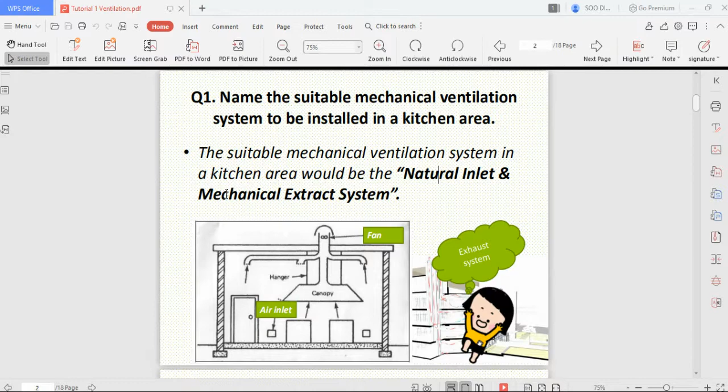This is like question 1, where the kitchen area also uses a mechanical extract and natural inlet system. There are 3 points to this. The first is air is extracted out from the assembly hall through extractor, inlet, ducting, and fan. This is the system, the components making up this ventilation system.

The second and third points are the important part. As you can see here, there's a negative pressure and a positive pressure. Ventilation works in such a way that a mechanical extraction system is installed to make these pressure differences occur. The pressure of the ventilated space becomes less than the pressure outside the room, which is a negative pressure. The higher pressure outside will force air into the negative space through the fresh air inlet or opening.

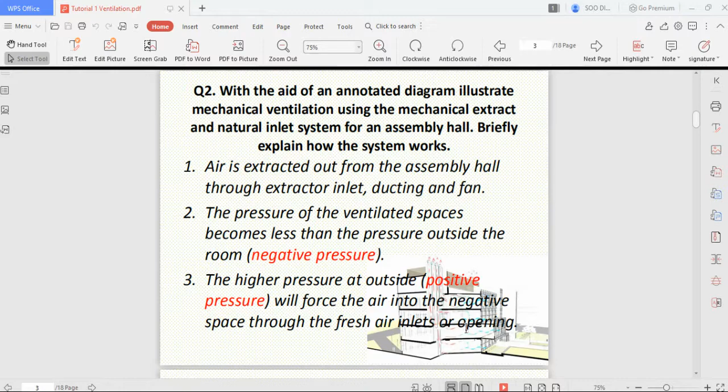There's a picture here, same as the kitchen area. You have a mechanical fan which will pull out the air in the room. This in turn will cause a negative pressure inside the room. As the air is being pushed out, because the outside air has a higher pressure than inside the room, the air outside will push through any entrance, such as this entrance door or corridor, into the room. If there's a window, the outdoor pressure, the air, will come into the room through that opening.

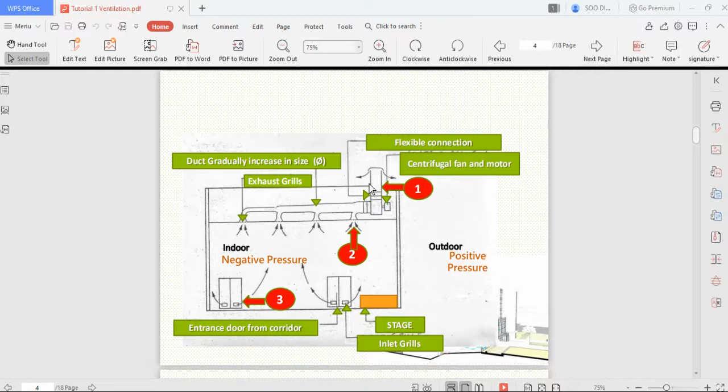In this case, there's an entrance door and an inlet. As this system is on, air will be extracted to this duct, then flow through the ventilation system and out into the atmosphere, to the outdoor. Because the outdoor has more pressure than inside the room, the air outside will force itself into the room through any opening, such as the entrance door or the inlet grill. This is how ventilation works, by having differences of pressure.

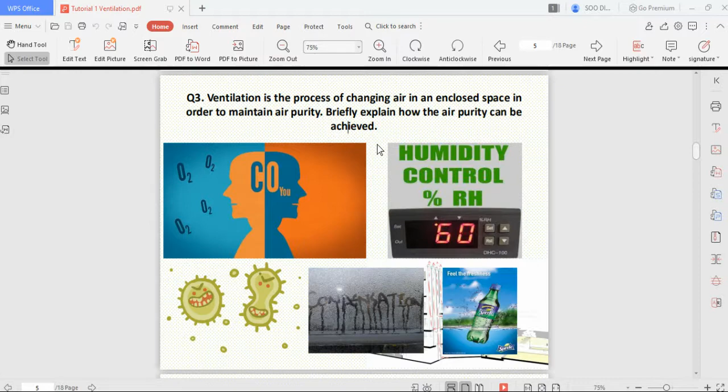Onto the third question. Ventilation is a process of changing air in an enclosed space, and they are asking how air purity can be achieved. Briefly, air purity can be achieved by preservation of oxygen content, removal of CO2, control of humidity, prevention of heat concentration, prevention of condensation, dispersion of concentration of bacteria, dilution and disposal of contamination, and provision of freshness.

In a room, if we are standing there, as we breathe, we will be exhaling CO2. With our breath, we are also expelling heat and water vapor from our body. That's why there's removal of CO2, control of humidity, and prevention of condensation, which is the formation of water droplets due to water vapor, and prevention of heat concentration because our breath has heat, plus dispersion of concentration of bacteria and dilution and disposal of contamination.

So this bacteria and contamination, if we have a room and we do not regularly regulate the air, which we do not regularly expel out all this old air in the room, you imagine that bacteria, fungus, all these decomposing organisms will breed and try to break down anything in the room, such as the wood and furniture, or anything organic in the room. So that's why you want to have regular change of air in the room. If not, then the room will have a lot of dust. So with ventilation, you will be able to make the air clean.

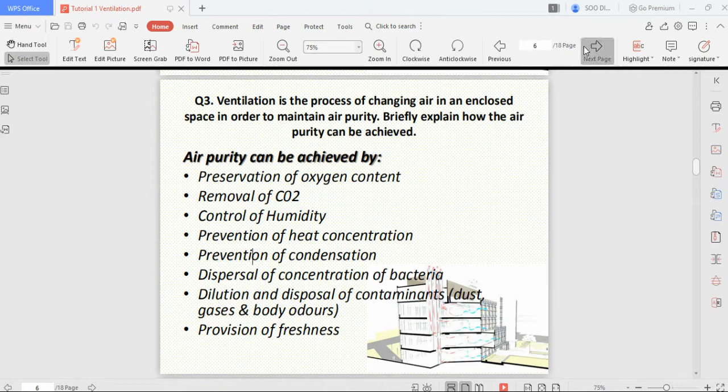Okay, so question 4 is asking what's the difference between natural and mechanical ventilation system of a building. So natural ventilation is economic because once you build a window, that's considered a natural ventilation. It uses wind to change the air in the room. So if you have a window and there's wind, which will cause changes of pressure from outside, having a high pressure blowing into the inside of the room, which is at the lower pressure, then you will be able to save in terms of your costing and operation cost.

Because you will not have a motor there driving the fan to pull in the air into the room or to extract the air out of the room. So mechanical ventilation system can provide positive ventilation at all times. This is one thing good about mechanical ventilation. Natural ventilation is cheap, but in a case where you don't have natural wind, then there will not be any ventilation in your building, which is bad. For a case where you would want to have ventilation at all times, or at times you can control, you want to install a mechanical ventilation system.

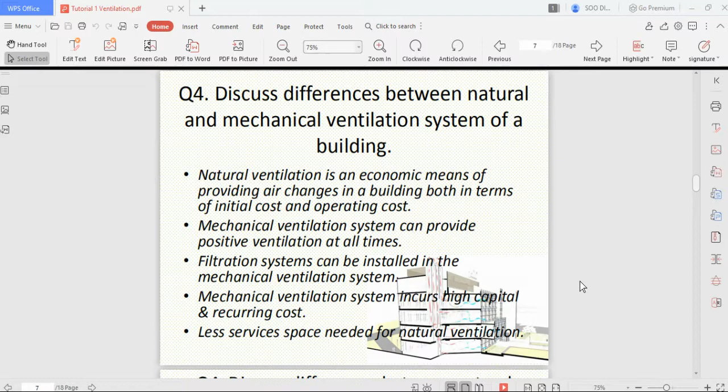So the difference between natural and mechanical ventilation is mechanical ventilation system can provide positive ventilation at all times, but they are expensive to run and install. Natural is able to provide cheap ventilation due to it using the natural energy on our earth, and you do not need a lot of space, you do not need to service it. But natural ventilation depends on the wind condition. If there is no wind, then you will not have any ventilation for your room.

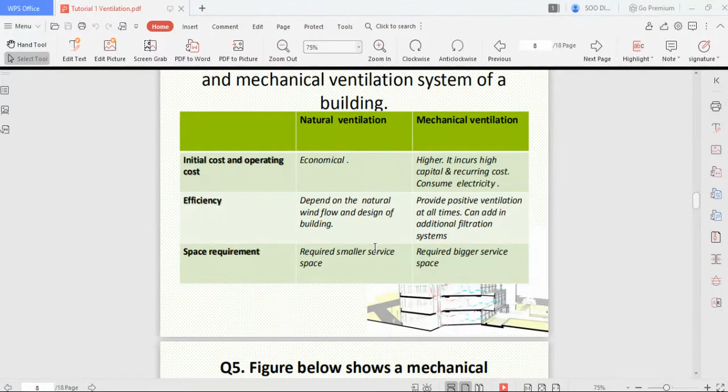And then the next one is space requirement. Natural ventilation does not need any service space. This service space which the mechanical ventilation requires is all this ducting, all this fan, all this filtration system, damper system, fan. So natural ventilation is simple. You just have a window at opposite sides of the room, left or right, or front and back, and then you have an easy and cheap natural ventilation for a room.

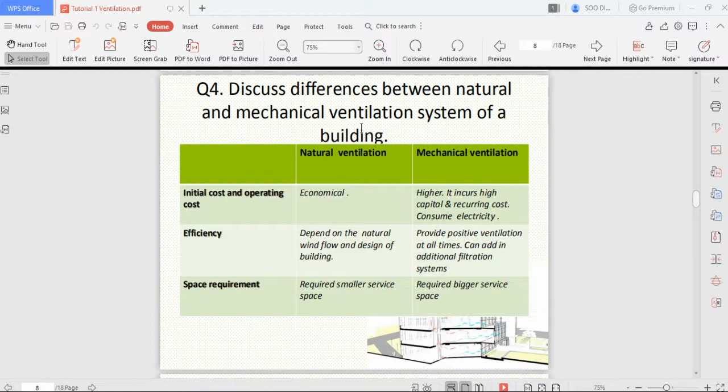Okay, so next question is 5. Figure below shows a mechanical ventilation system servicing two rooms. So it's asking you to name the ventilation system. Based on the figure, you are able to see there's a fan at A.

And if you look at the inlet, there is just an opening. So this is a natural inlet and mechanical exhaust system.

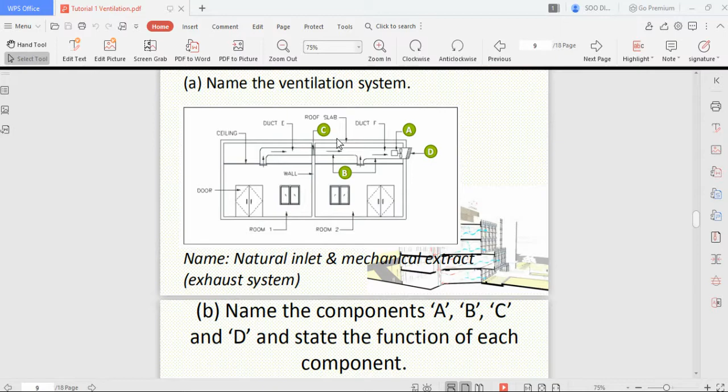So the second part is name the components A, B, C, and D. A is very obvious, it's a fan. B is the duct. C is the damper. And D is the diffuser.

So the fan is what you use to take out the air. You make the difference in pressure. You make the room low in pressure, and then with the high pressure from the outdoor, the fresh air will be able to force itself into the room.

So here the function says fan can produce high air pressure and is used for moving air through ductwork. Then B is your ductwork, which is a series of tubes to transfer the air between spaces in a building, and the fire damper is installed to prevent fire burning through the wall opening, so as to control the rate of combustion.

And the diffuser is circular, square, or rectangular. This is just to distribute the air when it goes outside.

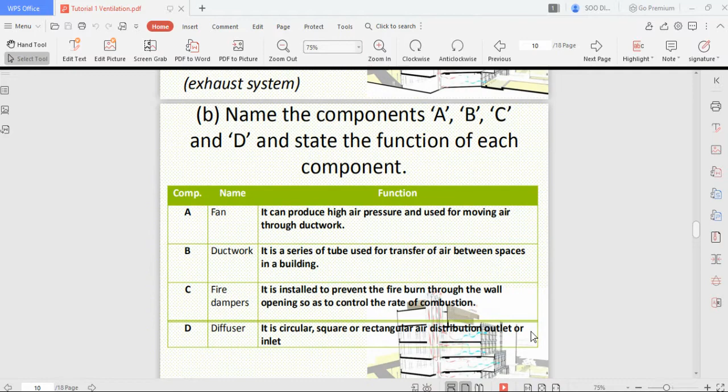So this is the basic component for a ventilation system. If you see here, it's pretty standard. You have, for this mechanical extractor, A which is the fan, and B is the duct for moving the air out.

And then you have C. You will find C, this is a fire damper at the section where there's a room A and room B, or in this case room 1 and room 2. So why do we need this?

A fire damper's function is to prevent a fire from burning through to the next room. So you do not want to have a very good room which is very fireproof, but you have an opening which is not fireproof. That's why you need this fire damper, so that in case a fire occurs in this room, the fire is just contained in this room.

So if your wall can withstand 2 hours, you want to make sure this fire damper can have a fire rating of 2 hours. If you have only 1 hour, then it's not advisable. You should upgrade it to match this room.

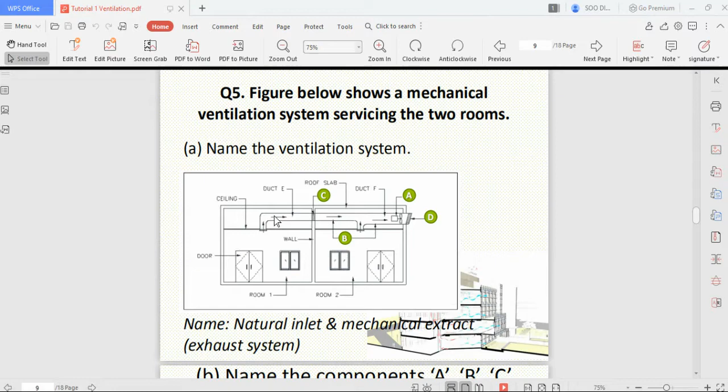In case a fire occurs, it would not just simply spread through your fire duct, through your exhaust duct. So this is the function of a fire damper.

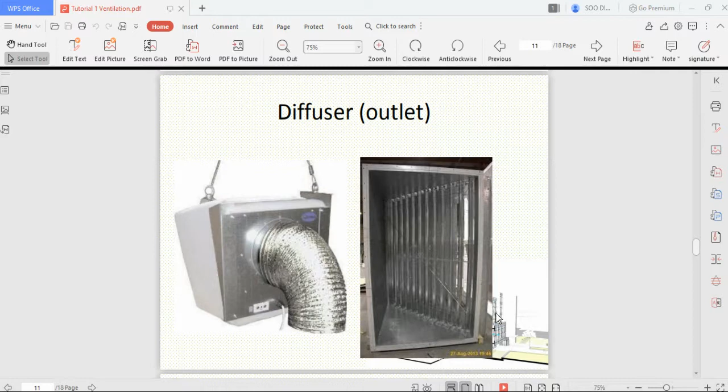Okay, so this is a picture of how a diffuser, how an outlet works. You'll be able to see this sort of diffuser outside. This is a square and rectangle diffuser.

And then this is also a diffuser, a square one. There will be a thermal sensor.

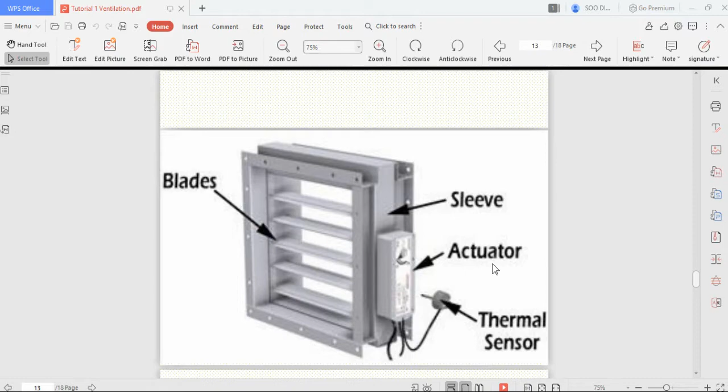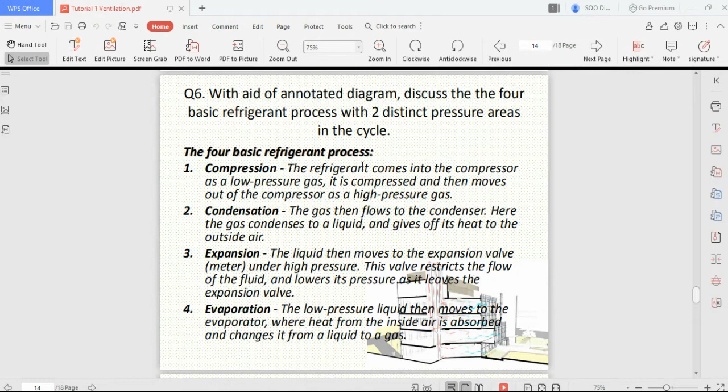So in condensation, the gas then flows to the condenser. Here the gas condenses to a liquid and gives off its heat to the outside air. Then in expansion, the liquid will expand, and in evaporation, the low pressure liquid then moves to the evaporator where heat from the inside air is absorbed and changes it from a liquid to a gas.

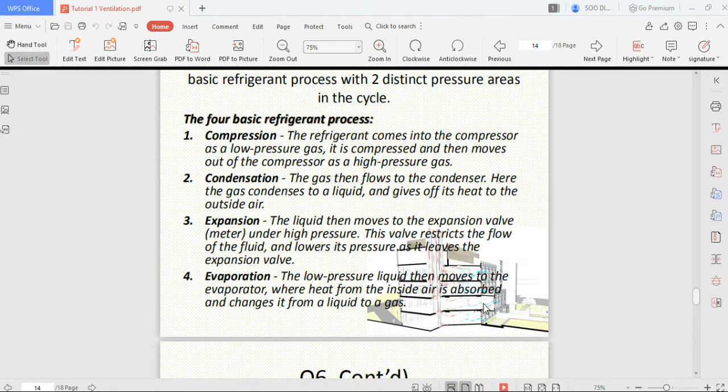So there are 2 distinct pressures in a refrigerant, which is low pressure and high pressure. Low pressure is at expansion and evaporation, and high pressure is at compression and condensation.

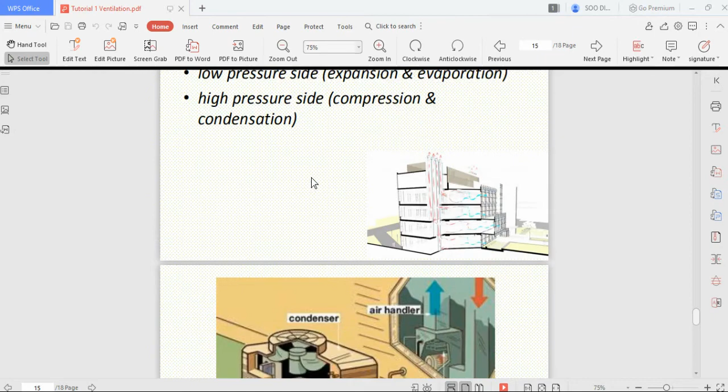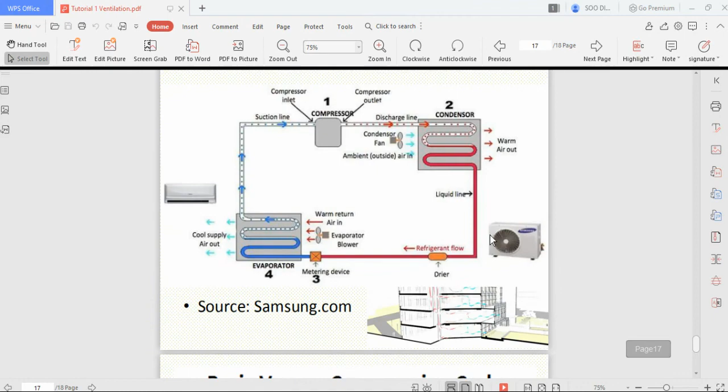So this is an image of how a refrigerator works. Another diagram for it. This is an image to show you how the refrigerator works, how these gases move from one cycle to another cycle, how they cool down your refrigerator.

So it's a repeat cycle. There will be 2 areas, which is high pressure and low pressure. So they start off at a compressor. The gas is compressed at high pressure and moved to the condenser.

So this is where the heat is released from the condenser. The heat is absorbed at the evaporator and then is released out here.

Then as they change state, as the heat is being released, as it moves along, it will reach the expansion valve. Then it will move to the evaporator and then it will move in a cycle.

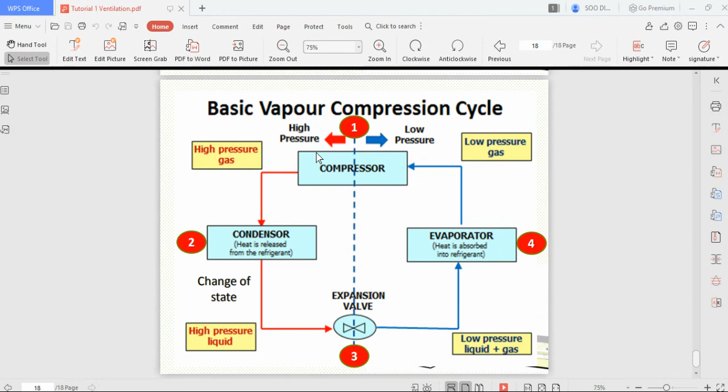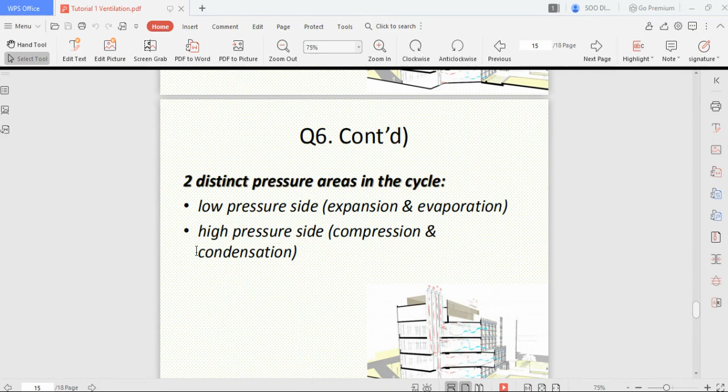So basically there are two states that are important, which is high pressure and low pressure. High pressure is at compression and condensation, and low pressure is at expansion and evaporation. So there are 4 cycles.